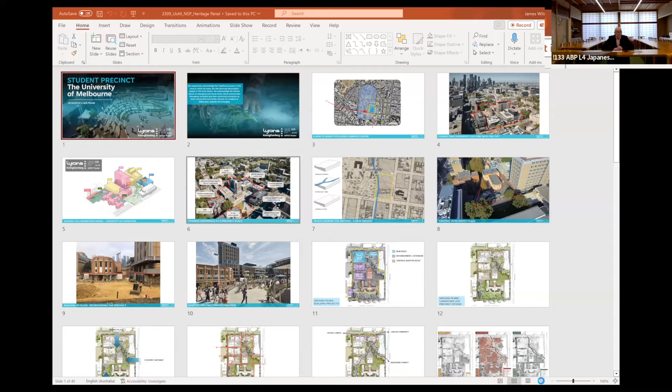Thanks, Philip. I'll add my number four yay to the vote as well, and I hope everyone's going to continue to tally throughout this presentation. Nathan and I are going to spend a few minutes setting up the precinct strategies—a lot to do with adaptation and heritage of a different time. I think Nigel and Marika will follow through with, I wouldn't say more straightforward, but more historical heritage, if you like. So the Student Precinct Project at the University of Melbourne is a large $230 million project that was done over the last six years.

It was indebted greatly to the knowledge of the local people, the Woiwurrung people, especially our collaborating Indigenous architect, Sarah Lynn Rees and Greenaway. But obviously we want to pay respects to all of the local Indigenous elders, past, present and emerging, as well as the ones that contributed to the project right across the country.

The project is in a corner of what would be considered the older reaches of the university, the big quadrangle here, on the corner of Grattan Street and Swanston Street. I think the story from the university is that it was moved there because that's the new epicentre of the university—and also because the student centre needed an available area of the university that required redevelopment.

But it hits two marks: it makes the student precinct an area of the university that now has outreach to Swanston Street and to the city. As you can see in this image, it's quite a large number of buildings integrated into this precinct. It connects straight to that spine into the city, but also connects into the depths of all the heritage and the campus of Melbourne University itself.

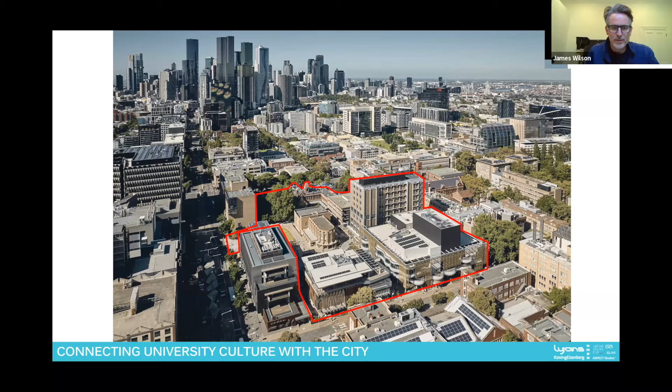It had a large collaboration team. On screen with us today is Koning Eisenberg, along with Lyons, NMBW. We also had Architects Eat, Greenaway Architects, along with two landscape architect firms, Aspect Studios and Glas. Everyone had a different part to play, dealing with different types of the brief—partly adaptive heritage and reuse, partly new build, partly urban design and landscape, and a lot to do with Indigenous knowledge coming into the whole precinct.

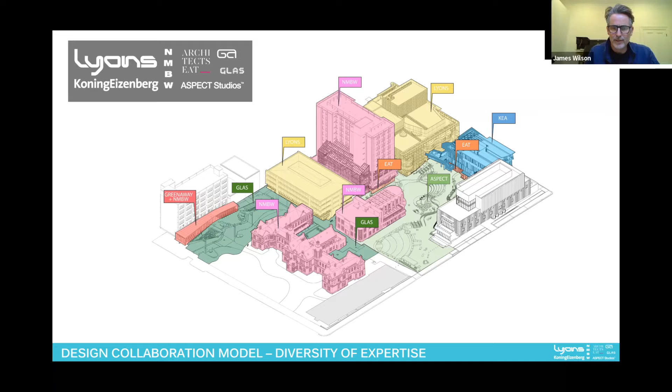I won't go into too much detail about what was in each of the buildings. Suffice to say, it was a complex array of things, all to do with student support and student culture.

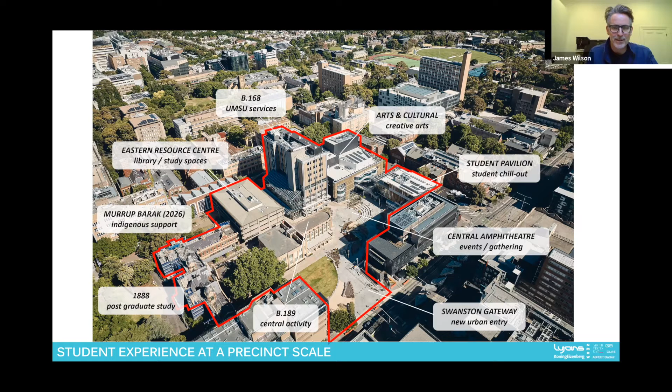Anything from performing arts through to events and gatherings, through to chill out zones, through to postgraduate studies, and importantly a bit that's still to come, an Indigenous Support Centre. So really it's a whole precinct revolved around student needs. It has no business case, it's not a faculty trying to get research money. It's all about students and about their experience.

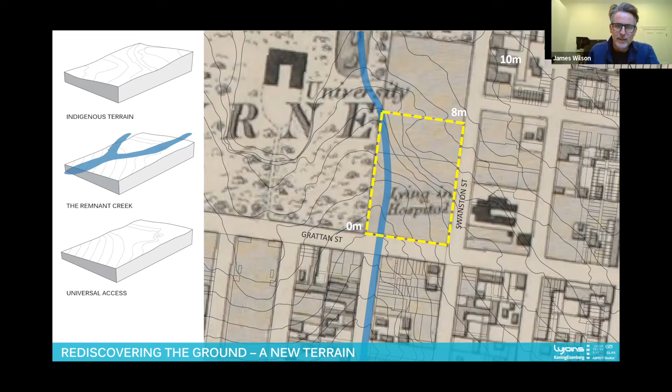The heritage of the site is really interesting. It's got a very steep slope from one corner to the other, about 8 metres. Generally the old contours of the site have been changed and altered with the built environment that's been brought into the site. So a lot of the history we looked at in terms of pre-building history was to do with the remnant creeks and waterways that came through the site, seeing if we couldn't introduce more of the Indigenous terrain that was there before the buildings themselves.

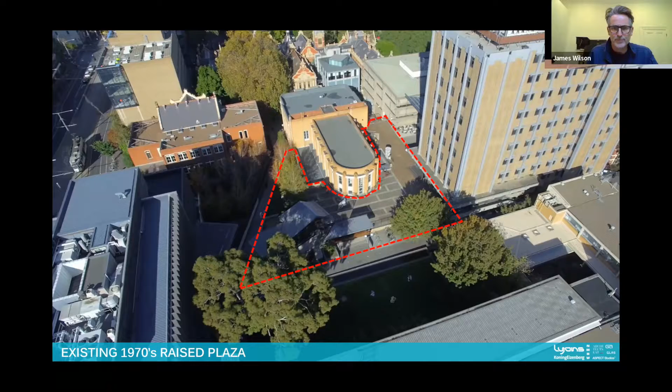But one of the biggest things we had to contend with was this raised plaza. If any of you know this precinct before the new precinct was built, it had a big 60s, 70s raised plaza that connected to these buildings to the right, the old Doug McDonell and the Eastern Resource Centre, under which stood lecture theatres, plant spaces, substations and so forth. But it really restricted a lot of the development around the site and the access through the site as well.

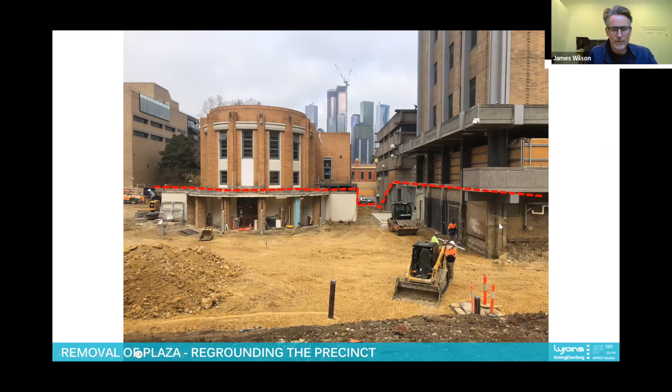So one of the earliest things done to the site, under a master plan early works by JCB Architects, was to remove this urban plaza, noted by the red line. What this did for us was, one, it brought it down to natural ground, which is a great starter for Indigenous cultural adaptation. Two, and this will be talked about later with Nigel and Marika, it uncovered a whole new ground interface which wasn't there before and had to be completely readapted from scratch. Effectively we've got this new precinct now, which, when you've integrated all those ground floor and new active components, is a complete transformation of the site.

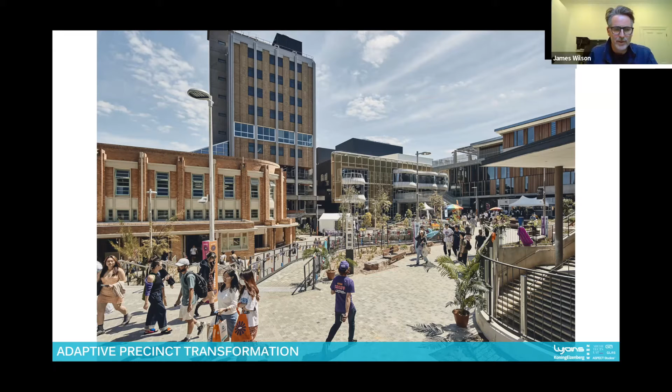The whole precinct was considered as landscape-led. So again, this was a story about starting with Indigenous ground and landscape, going through and around buildings. We literally master planned it, thinking about the pedestrian urban connections and groundscape first.

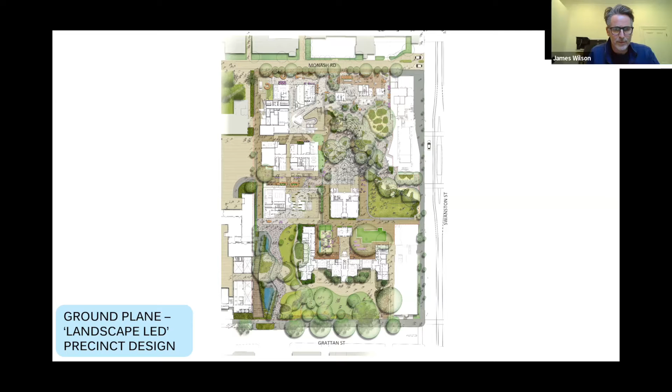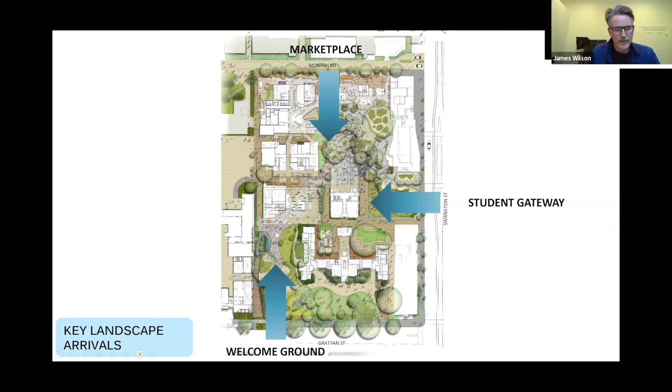And then it had 3 new important entry points. One from Swanston Street, a new opening to the university through a gateway created by actually knocking down an old heritage building, the John Smyth. An entry from Monash Road through a very active retail precinct, and a new idea of an entry from the south of Grattan Street called the Welcome Ground. This was an Indigenous terrain that was basically built into the project.

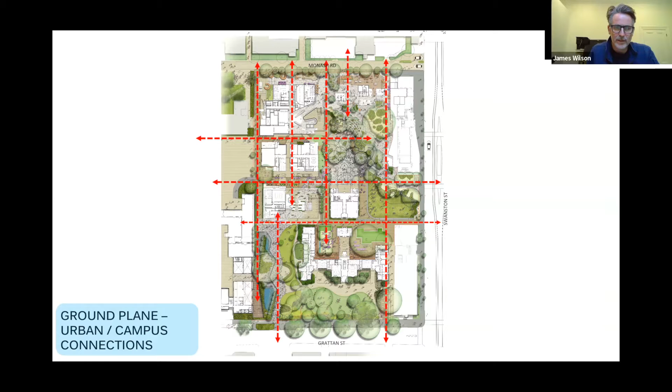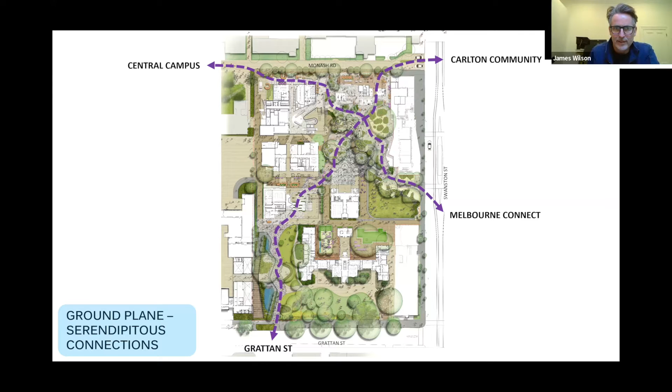We also wanted to connect with the heritage of the campus itself. It's not a precinct unto itself, it's connected to a much wider campus. So a lot of these laneways and access ways into the site were also brought within the precinct. But we also wanted the serendipitous to be known as well, people wandering through the site under these strange walkways, connecting Melbourne Connect, a new part of the campus, the Carlton community and Grattan Street.

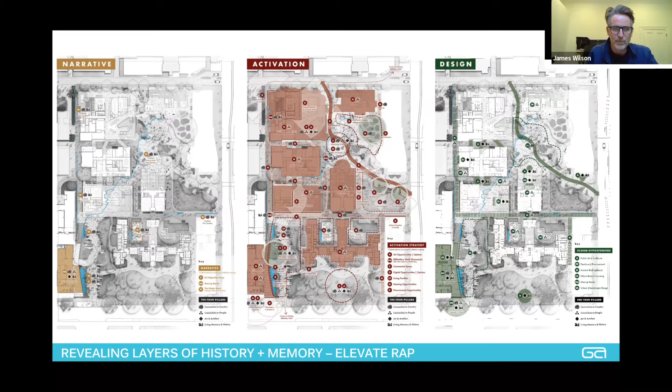Importantly, the work that GA did in terms of really looking at cultural histories and Indigenous histories was to look at what narratives and activations we could integrate into the precinct, into design. So part of the Elevate RAP that we were following, that the university had just instigated as part of the university's strategy, was to integrate physical properties and memory into the precinct. This is very different to just acknowledging Indigenous cultures, it's actually doing something.

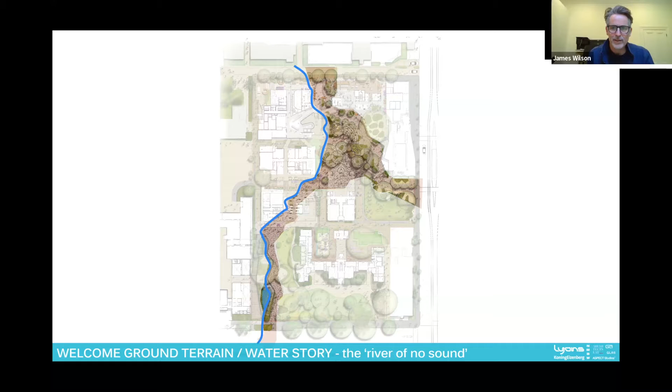And it went from the sort of mega stories, like the water story, the River of No Sound that was taken away from this site, integrating it back into the terrain, and actually having a landscape story that integrated local stones from around Victoria. This is a really big idea, down to really smaller ideas, like embedding Indigenous identity bricks into heritage fabric, which embeds cultural memory into old fabric and old projects.

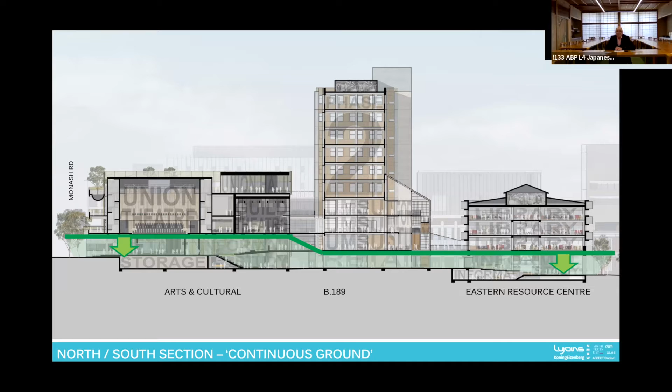Hi everyone, I'm Nathan Bishop, partner in charge of design at Koning Eizenberg and lead designer for the Student Pavilion. You want to go to the next one, James? You go to the next slide.

There we go. You may be able to tell I am not Australian, so I speak today completely... Oh, go one back to the pavilion, James. Sorry.

So I'm here today as an outsider and certainly not an expert in Australian history, but I want to zoom out for a minute and talk about a certain thread I see in the precinct, about changes in ideas about university life, the changing role of the university in the life of the city, and changing ideas about the lives of students while at school. I see a shift for the university from a space of detachment or removal for the purposes of study and becoming, which is still a notion very present in American universities. I see it moving away from the idea of a cloister, with buildings and spaces that disconnect and detach from the ground and context, to more of a place of connection, fostering community, creating transparency, interconnectedness, visibility, and inclusiveness. So this is a certain inversion, a turning inside out of this old cloister model to one of more engagement and encounter that I think is present across the precinct.

So the Student Pavilion that you see here on Monash makes an effort to feel embedded into the land, with nooks and crannies carved into the sidewalk, trying to create spaces of encounter and foster a new kind of attachment, engagement, and entanglement with public space. Go to the next one, James.

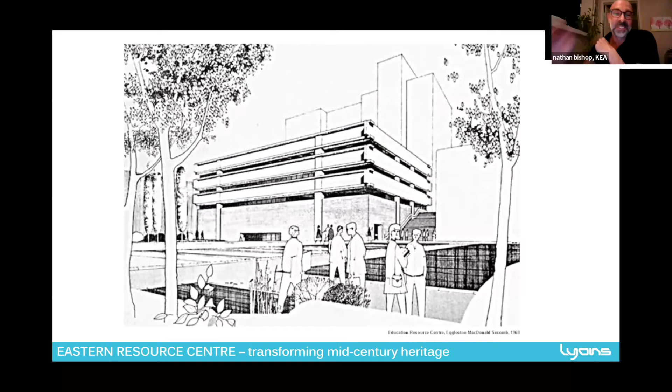I think that's a cool animation, I didn't see that in the original. I think the ERC typifies this inversion I'm talking about, where a formerly introverted building detached from its context is turned inside out, transformed from a place of seclusion and detachment to a space of engagement and support for social dimensions, making fuzzier edges and blurrier boundaries, creating more visibility and activity, and presenting a new model for engagement between building, grounds, and people at school. You go to the next one.

So the strategy really pervades the precinct, making fewer and fewer discrete spaces and erasing more and more of the interiors of buildings to have a more continuous flow of public space originating in the landscape. Next slide.

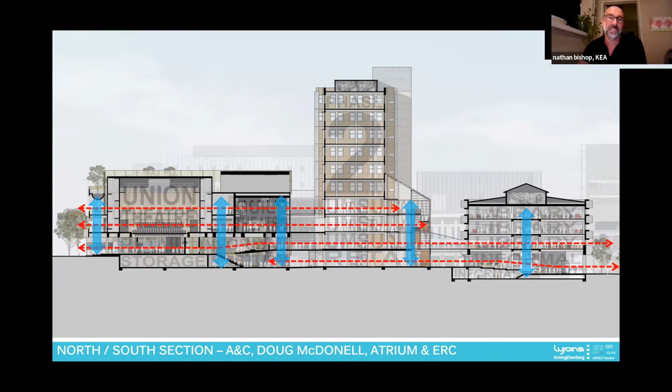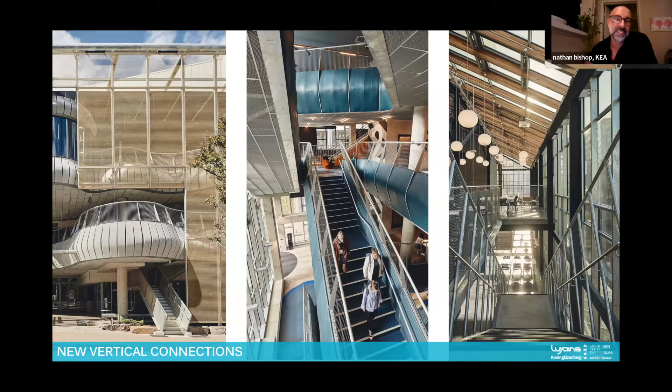It's brought through places of vertical movement, interconnecting all levels with visible movement and activity, threading through all the spaces. Go to the next slide. So the Student Pavilion, with its upper level balconies and patios, tries to make them more visibly engaged with multiplied ideas about ground over the whole height of the building. Go to the next slide.

And lastly, we have this expressive stair and bridge linking arts and culture and the amphitheater, all pulled up through the building, creating more spaces where you can see people moving, which is also a kind of inversion on buildings. So with the pavilion, we're really trying to add a kind of architecture to the university that would support a form of casual social engagement, placing it within the precinct to foreground a new kind of idea space for students. It's a model that stands in contrast, or as an alternative, to more conventional institutional, privileged notions of academic space, offering a more inclusive social space.

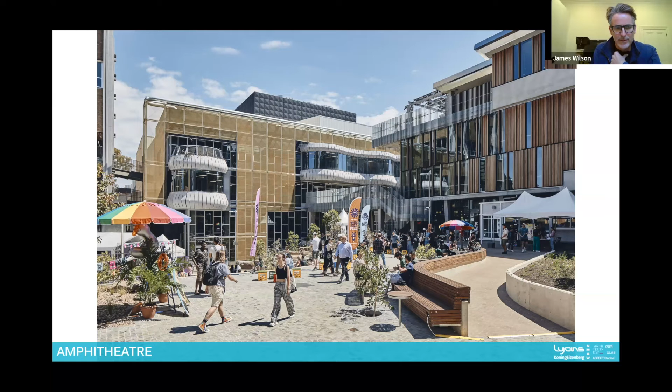And again, I'll flick through these because I think we'll get onto the actual memory and heritage parts that Nigel will take over.

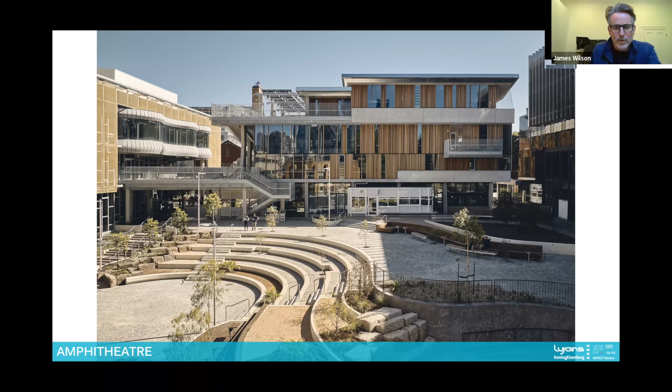But the major part I'll finish off on was the amphitheatre. It's a very new part of the university, and a big part of the Indigenous story about connecting, yarning, landscape, bringing everyone together within the centre of the precinct. And of course, it's amplified by this beautiful restored Frank Tate building, which I'll hand over to Nigel and Marika to talk about.

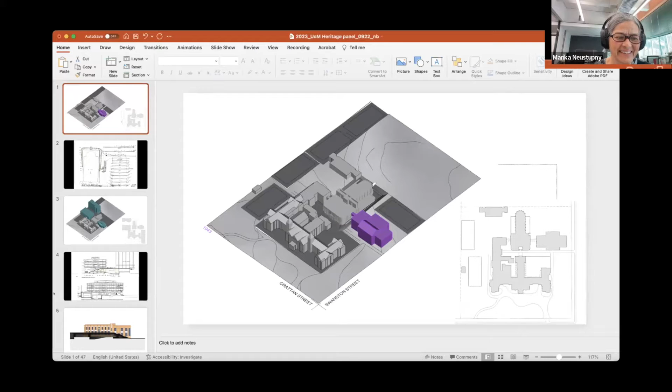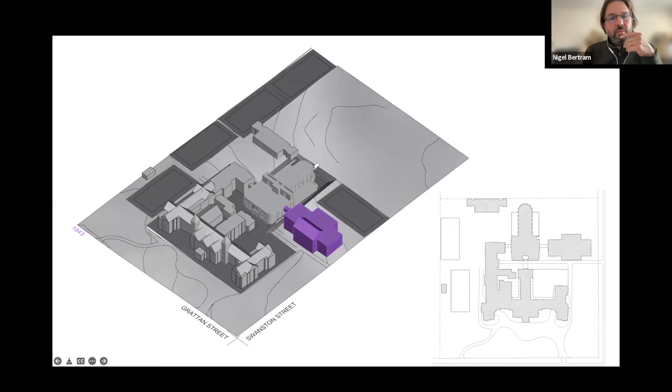Okay, I'm going to move straight on and just say that part of the process of unpacking this previous teachers' college, we actually had to reconstruct physically the layers of what happened. Some curious things - like the old Frank Tate building was originally just an appendage to the 1888 building, literally linked by raised bridges. And the current apse, facing the amphitheatre, was the back of the building, like a fire escape, embedded into the ground in a kind of retaining wall.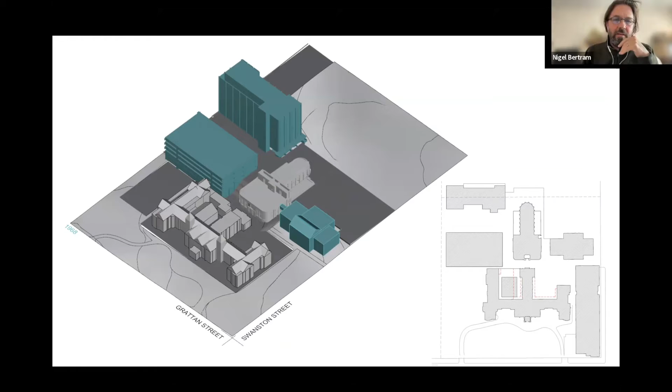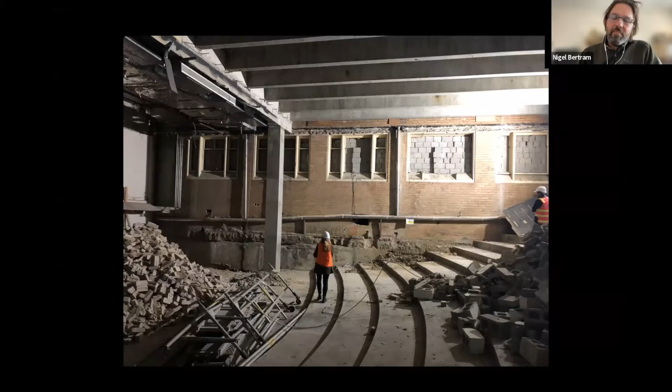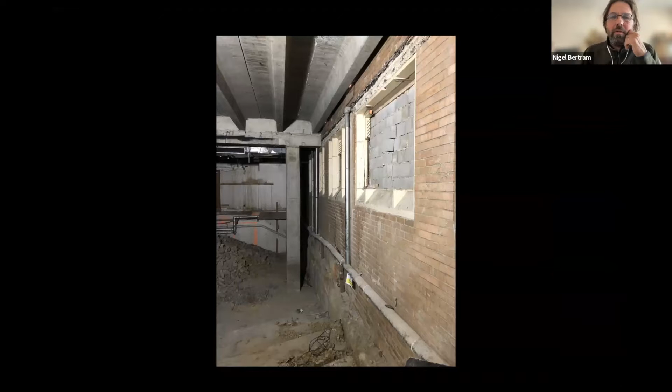And then in the 60s, when this raised plaza and the late modern buildings got built, of course, as James said, everything changed. So we were very interested in these strange moments of different ideas overlapping and bashing onto each other, and started trying to literally draw that out to understand the problem we were faced with. At this great moment when the demolition had been done, in the photos James showed, it was exciting to find the old fabric of the building that was previously covered in plasterboard and reveal it - you can see it's in pretty bad condition.

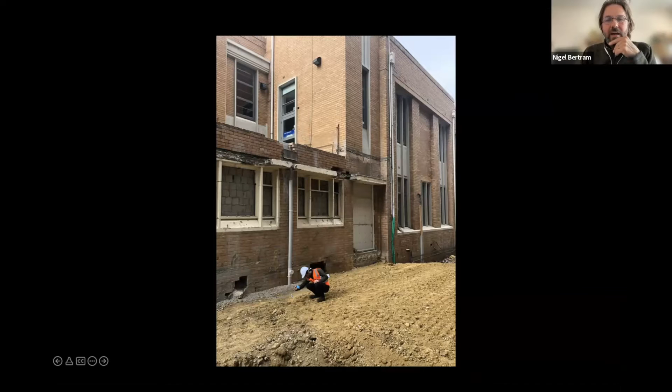The concrete's been hacked off and the windows have been blocked in. And this is how we found this kind of archaeological ruin almost of the building that's been embedded in the ground.

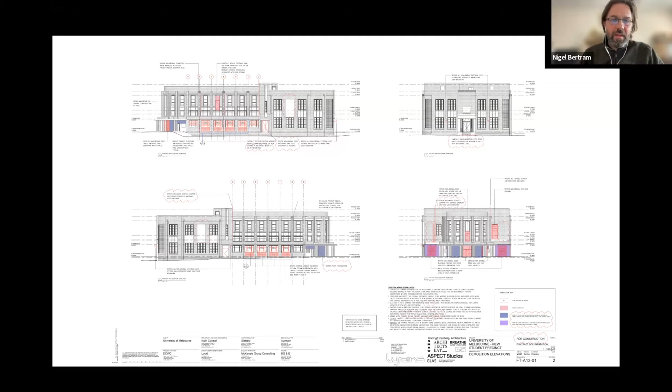Our process for design was to try to be very careful and understand what was important and what was not. The outside of this building was heritage listed, but the inside was not. But we thought the whole brick interior meant we had to treat the whole thing with great care and respect. So this is the demolition plan of the non-original bits, and this is the repair plan, which is the conservation works to bring that very degraded building back to some form of wholeness.

At the same time, the original building was quite odd and completely disconnected from its context. The main gymnasium was flanked by toilets and change rooms, and the whole thing was rigidly symmetrical, following the segregation of the sexes from the 1940s ideology of the Teachers' College.

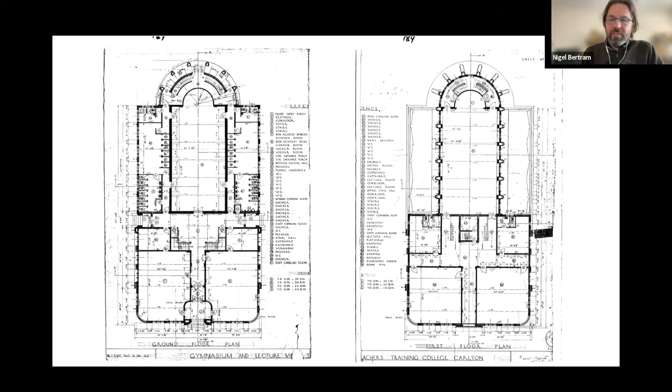So we thought that to put that into the contemporary university framework that Nathan was talking about, some actual quite dramatic or even violent change was required.

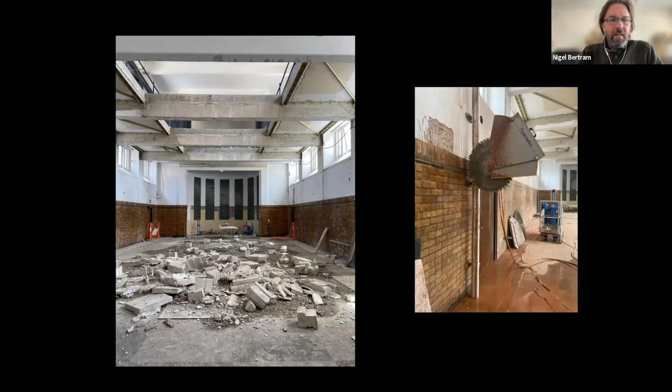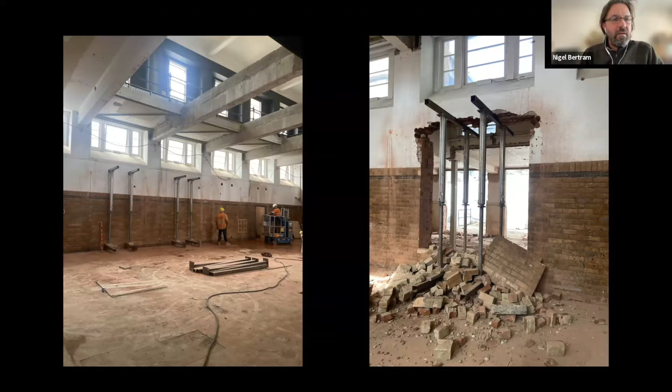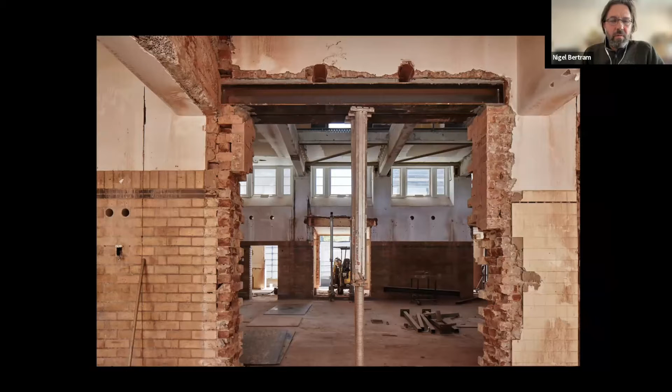So we thought we'd have a go at cutting a few holes, in what is load-bearing brickwork construction. We became very interested in these needle and prop techniques that opened up a logical series of openings that both completely transformed, but also respected the structural imprint, or the parti, of the building.

So the old gymnasium, which was a completely isolated chamber, is now a free-flowing space that extends vertically and horizontally, and the students can literally flow through it. You might think of it as democratizing the space we found, bringing it into a new era of a new role for a university campus in society and in the city.

When we had to intervene, we felt under great pressure to do something that was both new and also understanding of the original Percy Everett design ethos.

So the doors allow a whole lot of different uses of this building, which was previously like a tomb, and now is able to be activated and have bands and sausage sizzles and ping pong tournaments and all sorts of things.

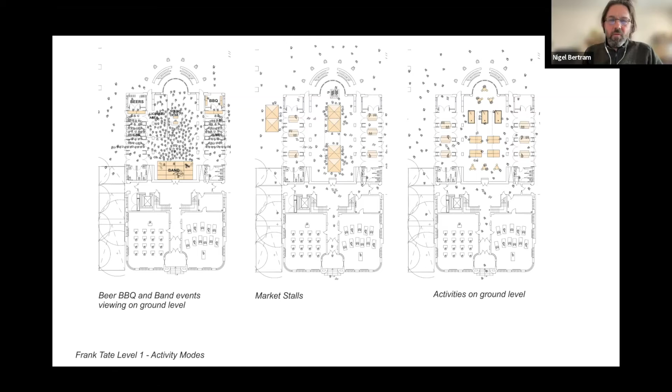And this horizontal connectivity through the new doors, with the raised floor, brings it up to the new welcome ground paving, so that student life can just flow through it.

So we'll switch to talking about 1888, which is that E-shaped building. Yep, just on the left next to Frank Tate in the middle.

168, say. And the courtyard is just what I wanted to point out here, that the courtyard is suddenly linking 1888 through all the way to the rest of the precinct, whereas previously it was really separated off.

And we'll show you a few slides of how now from the courtyard we can look up all the way to 168 that Nigel was just talking about, Frank Tate, the ERC with the little animation on the left, and all the way through to arts and culture and so on, and up to Monash Road.

Yes, next. So the plan of the 1888 building, just quickly—there were four main insertions that we made. So two of them are quite surface. Just on the middle at the top is a sort of circular window.

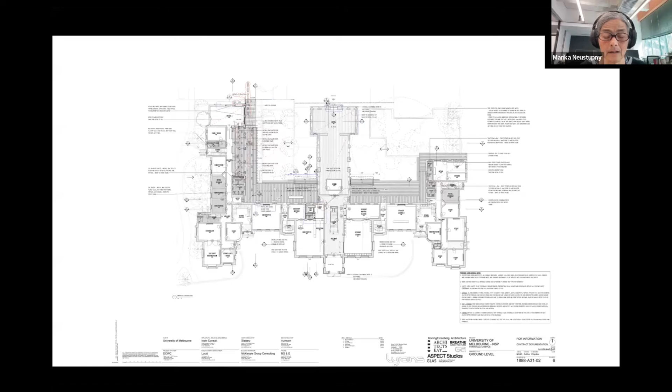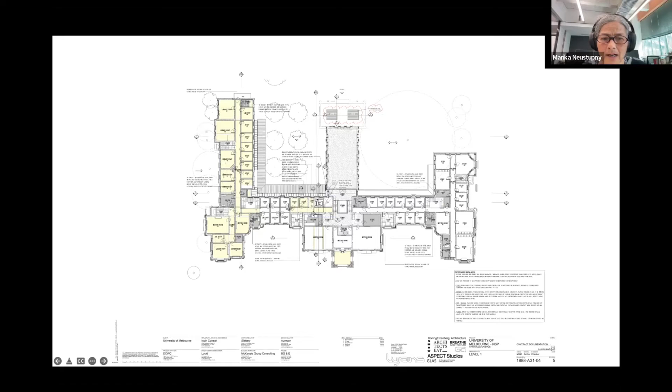Here's a couple of plans, just to show you that the new lift is in this location, which means it can also open into the Griffin Gallery, at a sort of mid-level, which the old lift couldn't do. This also means it can interact with all the levels, including this main level, upper level, and even the top level. All these were not able to be accessed with the previous external lift.

So internally, there was minimal work, but it was about retaining and allowing the existing condition to be recognised, including, for example, pulling the furniture away from the windows so that you could actually get near the windows and experience the beautiful work that's there.

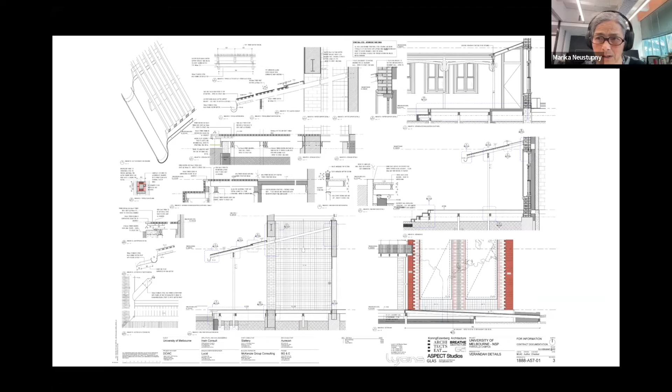So here's the insert with the veranda, which links with the gutter detail straight towards the courtyard, water story, which James was mentioning, linking all the way through into the details of the courtyard. People walking through in various directions, experiencing the new glazed bricks, the new circular window, relationships to ERC and the Frank Tate building, and an actual experience of the old stairway that's been removed.

So this is all part of our discussion of trying to actually make prominent and visible the layers of history, rather than just deleting them or covering them up in one way or the other. So suddenly all our portions of the project become part of the whole precinct, with a sense of continuity and change at the same time.

So there's restoration within a new setting and experience - the revealing of history and the new use and activity, which, for example, Nigel was talking about, really makes it possible to experience and understand the kind of layers of history that are there.

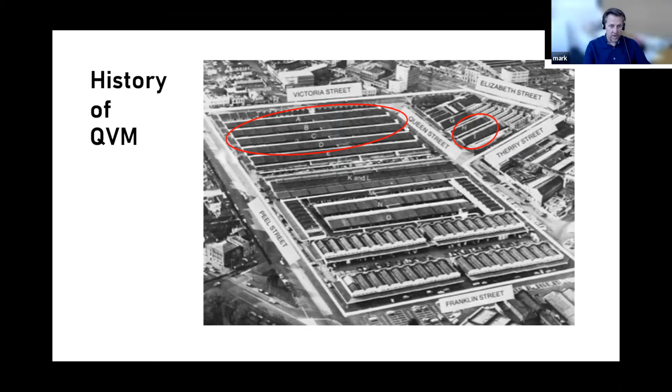But our works, and the collection of buildings, are on the national list as well as the state list, Heritage Victoria's list, and also the local listing, just to recognise that post-European heritage. As I said, there is that traditional layer there too, which isn't really seen through the sheds, but our project really focused on the buildings and the restorations of the buildings.

So with the brief itself, it was one we worked on in conjunction with the City of Melbourne, and it involved the complete overhaul of sheds A to D, and H and I, covering all the structure and services. We also looked at improved trader facilities, to ensure the market continued to operate and could offer a greater variety of programs, as well as a more diverse beverage market offering.

As part of that brief, it was important for the City of Melbourne and the market itself to make sure the works took place in situ. This is really where a lot of the challenges lay, in allowing the works to continue with minimal disruption to the traders and to the market itself. It was also important for the project to allow changes which didn't adversely impact the heritage fabric of the sheds.

Part of the brief was also to have consultation with the stakeholders and the general public, and that was really important to the City of Melbourne to have built into the brief itself.

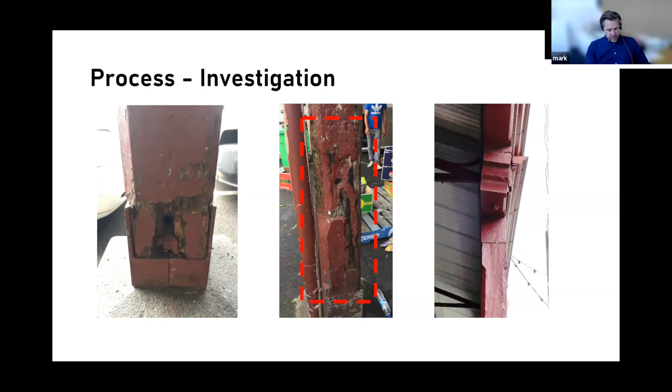Now, Mark, you've gone 9 minutes. Oh, 9 minutes, okay. All right, cool. I'll speed up. Yeah, no worries.

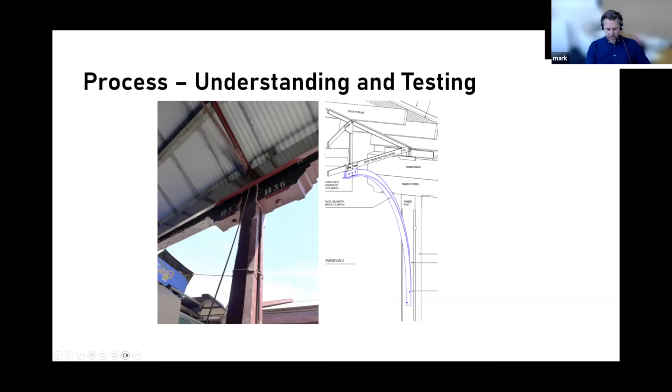So I'll just flick through the slides then. We did a lot of understanding and testing, a lot of drawings where we were understanding what the issues were, with a lot of input from the structural engineers in dealing with these issues. We then did a series of drawings looking at what the decays were, and a lot of documentation so we could inform the builder of how to go about it, so step-by-step drawings were produced.

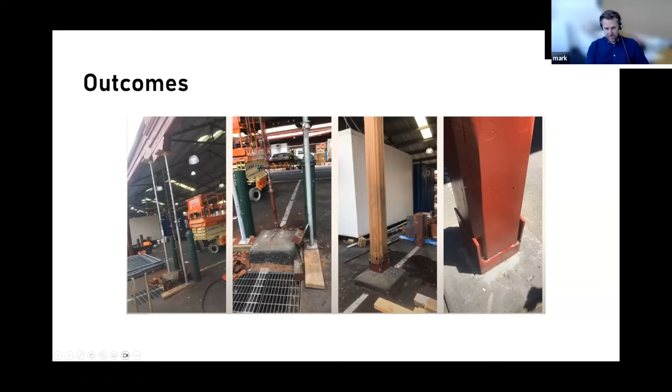And these were some of the outcomes, where new timber posts were put in, new section joists were put in with scarfing of the stirrups at the bottom there. A new timber roof was put on, and a lot of repair works were done to the trusses themselves.

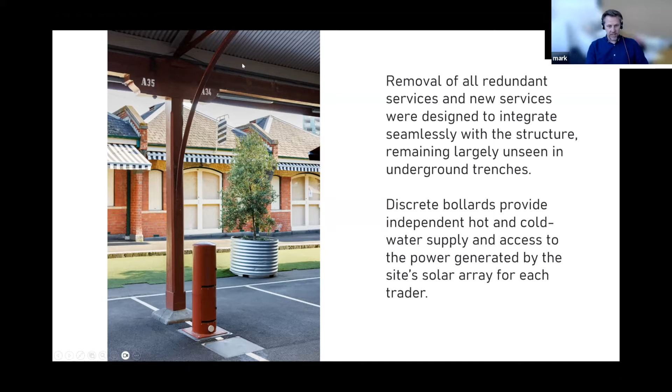And really the outcome is this: there are some new service bollards which service the traders, and this allowed all the redundant infrastructure to be removed. This is point of sale information that NH Architecture worked closely with the traders on.

To summarise the challenges we had: it was really important to preserve the tangible and intangible values of the sheds, as they're a really important part of Melbourne's history. It was important to retain that historical patina, so we weren't just taking things out because they looked scruffy. We wanted to keep the fabric, and that brought challenges in balancing modern building and commercial standards. A lot of input from the structural engineer and building surveyor enabled the site to be viable with longevity as a continued and flexible market space.

So there we go. Did I make the 10 minutes, Philip?

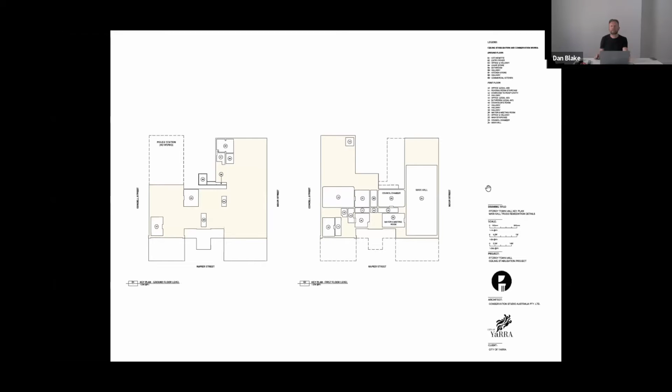Looking at various ways of consolidating ceilings, there are a number of different approaches to this issue. One method is the pinning system, which is a mechanical based fixing system. We would tend to use that system where we're unable to access the floor cavity or ceiling cavity, or where removal of floors above would cause more detrimental impact than losing small amounts of plaster ceiling in order to achieve a mechanical fixing detail.

Where cavities above ceiling spaces are able to be accessed, we would look at a resin system, a 2-part epoxy resin applied in two applications, which consolidates the ceiling and bonds what we call the lath keys, which are plaster keys that help hold the plaster to the lath system back to the original plaster.

In the main hall, we had really deep profile moldings where we wouldn't get saturation of that epoxy resin system into the depth of the molding. So we looked at using copper cable wire to tie off those deep profile moldings and ensure they're re-adhered back to the ceiling structure above.

You can see below the mayor's meeting room, a space with a decorative ceiling dating from the early 1910s that was consolidated. This ceiling was repaired in the 1980s and had a lot of repair systems that had begun to fail and change.

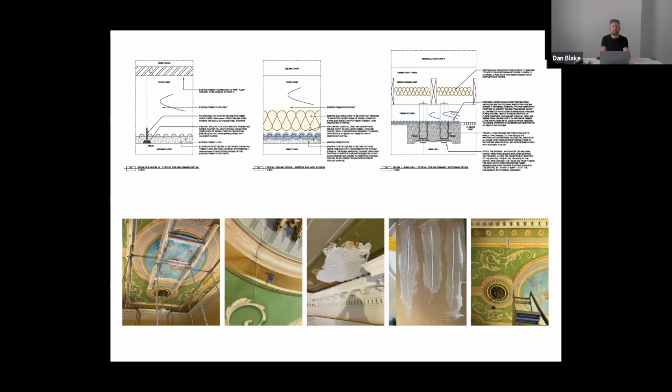This is the former council chamber. In the 1930s, a new ceiling was put into the council chamber which concealed an earlier original paper hand-painted ceiling with stencil work.

While doing works on the site in February, we had very heavy rain events that resulted in flash flooding of the roof above. These internalised gutter systems, which took the front gutter to the middle gutter and to the rear gutter, were not coping with that. They were overflowing and flooding, causing damage to the 1930s ceiling.

And as we then later found out, below that was the paper ceiling, completely covered in mold and very, very badly damaged.

As part of this work, we investigated putting in a very contemporary and modern hydraulic system, which is a closed siphonic system that we retrospectively added to the drainage system. This now allows us to take all the water from the front and back and provide overflows to the roof that previously didn't have them. This is using an adaptation of current modern technology applied to a heritage building to solve a complex situation without altering the building in a major way. We're able to leave the original box gutters internalised in the roof, side by side with the new system.

The mould, obviously, is severely damaged. This was assessed heavily by conservators, and we reviewed this over a long period of time, trying to dry out the room and dehumidify it. Unfortunately, it resulted in an enormous loss of paper, about 50% of the actual room, retaining smaller areas of the original paper here, which we were able to clean and conserve by mechanically scraping back little bits of surface mould. The timber lining substrate above also had mould on it.

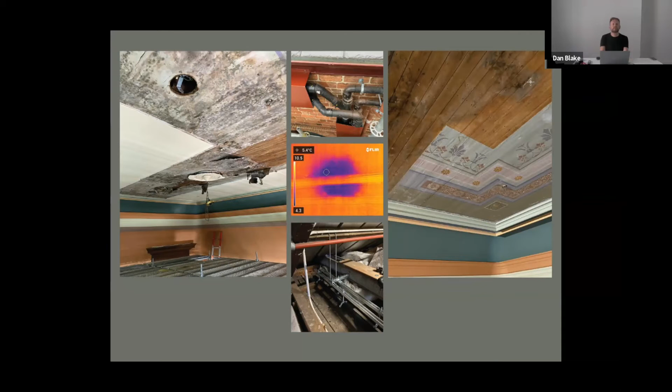This was brushed and sanded back to remove mould so that we could retain the original substrate. We then began working with a series of specialist trades to restore this ceiling and conserve the parts of it that still remained, including looking at very traditional installation techniques. This paper ceiling is over a hessian lining, like a scrim, pulled tight over the timber lining boards. This is not a technique that is used very regularly anymore; it's a very rare technique of applying these sorts of finishes.

We worked extremely closely with a plasterer, a decorator, and conservators, trialling this many different times to make sure we got the tension in the hessian correctly, and made sure we got the right amount of glue without causing too much problem with the paper once it was lined. We then went through the process of reinstating all the missing parts of the ceiling.

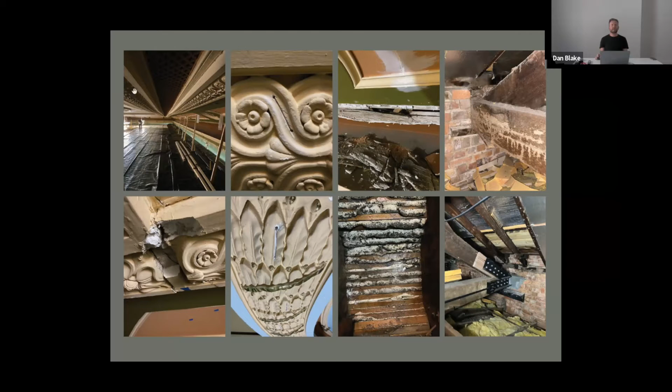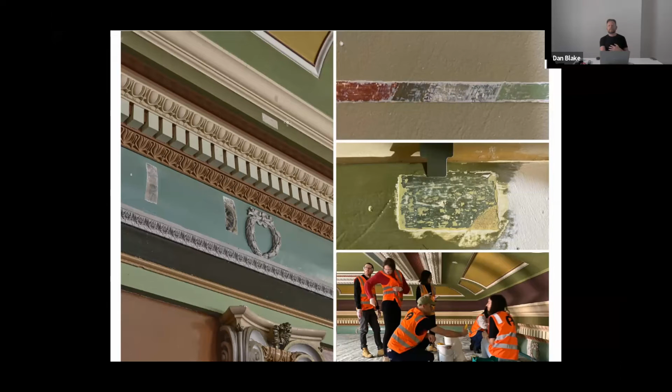We then went through a process of Westox treating the ceiling, a two-part epoxy resin to bond it all back together, and began a stitching pattern on all the deeper mouldings, these very deep profile mouldings. You can see the wave in that ceiling as it had begun to collapse. We also went through paint sample analysis to determine the original scheme and investigated the entire ceiling scheme over several months. This documentation shows all the original stencil design work, but unfortunately we didn't have the budget to reinstate all the stencil work, though we did restore the correct colour scheme.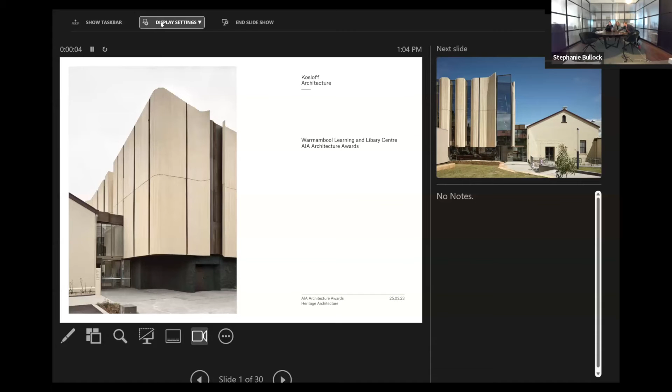That's right. Now you're good. Excellent.

In terms of this particular project, we would also like to acknowledge the traditional owners of the site on which the project stands. It's in Warrnambool, so the Gunditjmara people as well.

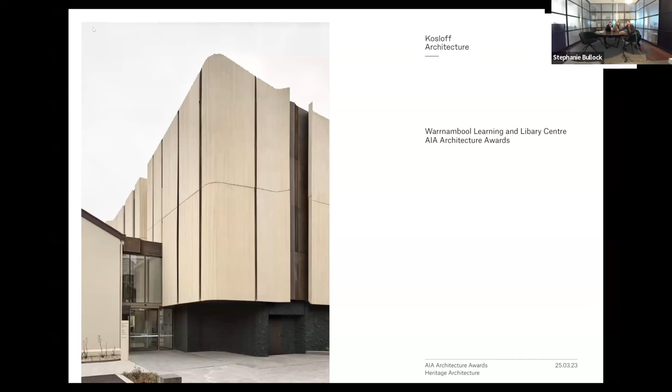This project grappled with two fundamental questions originally: can public architecture be a real agent for change within a regional community? And second, how might we breathe new life into a heritage context through a contemporary lens?

The Warrnambool Learning and Library Centre is in Warrnambool, a beach town west of Melbourne, on the Great Ocean Road. The project was jointly funded by the Victorian Government, South West TAFE, and the Warrnambool City Council, and consequently had a very complex client governance structure.

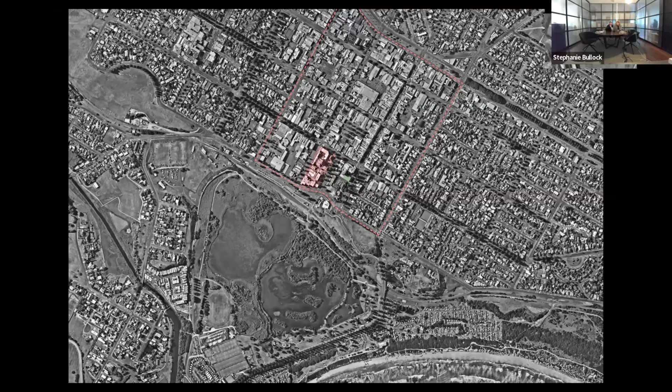It replaced the existing Warrnambool Library, shown in green on the slide, with a much larger space in the heart of Warrnambool CBD.

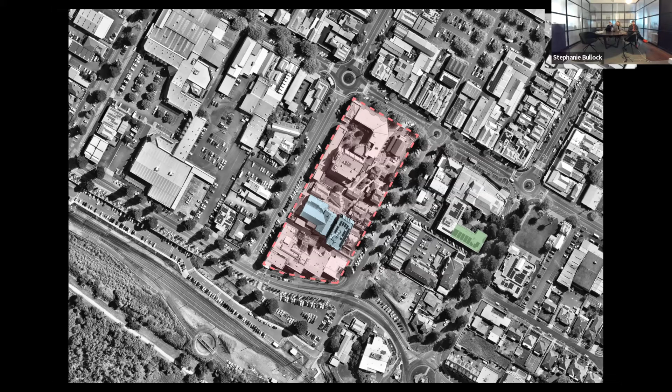At the start of the project, we looked at a variety of potential sites and also buildings for adaptive reuse within the campus.

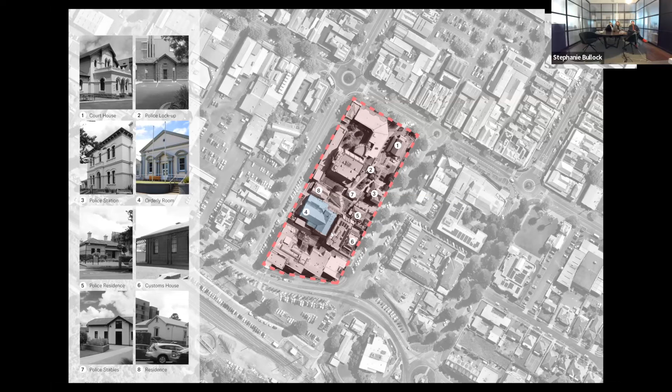In the end, the optimum combinational location was determined to be to refurbish the largest existing heritage building on the site, which is the orderly room, shown in blue, and then to extend this or connect it to a new 3-storey contemporary structure.

We worked very closely with heritage consultant Bryce Raworth to understand the history of the site and the orderly room in particular. Through the research Bryce did, it was determined that the building had been extended several times over the years. The first 3 stages were considered to be of most heritage value, and all of these have been retained within the final design.

The research Bryce did also revealed that during the second extension to the building in 1875, the orderly room was extended east and a stage was added at the eastern end. Whilst this stage had been removed many years before we started on the project, this understanding of the original operation of the main hall contributed significantly to our understanding of how we might link the original building and the new 3-storey contemporary structure.

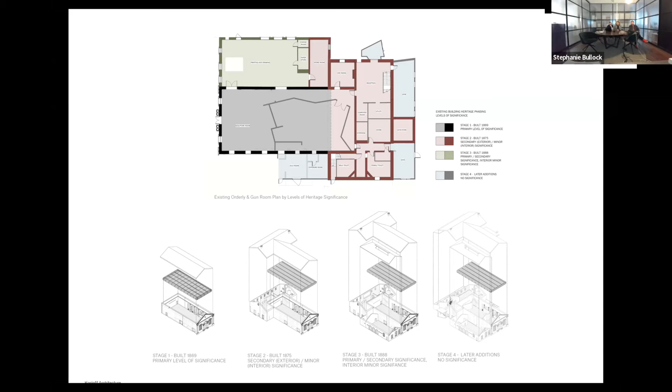We had 2 really key site strategies that informed the formal resolution of our design. The first, on the left, was connection through the building and campus, central campus straight up to the CBD, which was to the north. The second was really maintaining a north-south connection through the campus with an internal laneway that separated the orderly room from our contemporary extension.

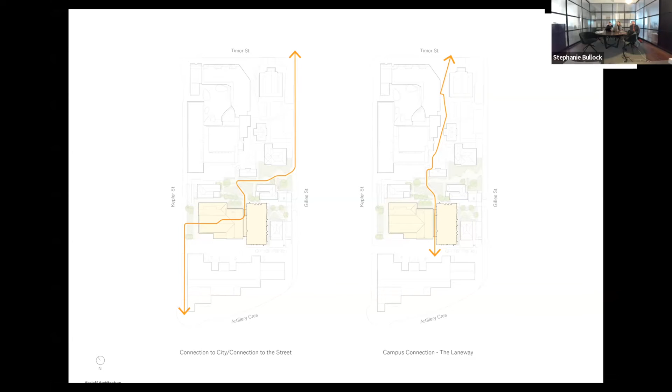You can see from this site plan that the project included significant external works to develop pathways from the building to both adjacent streets and other areas within the campus. This also included navigating a very significant level change from the street and the northern part of the campus in particular. The orderly room is on the western side, and the new contemporary addition is located to the east.

The orderly room and the contemporary extension are knitted together with the insertion of a new grand stair. There's a glazed linkway between the two that draws light back into the centre of the building, but also provides a very clear distinction between the heritage element and our contemporary addition.

The grand stair or bridge operates in a similarly performative manner as the original stage within this room, with landings that offer space enough for seating and performances, and the kind of return of the speaker's corner, if you like.

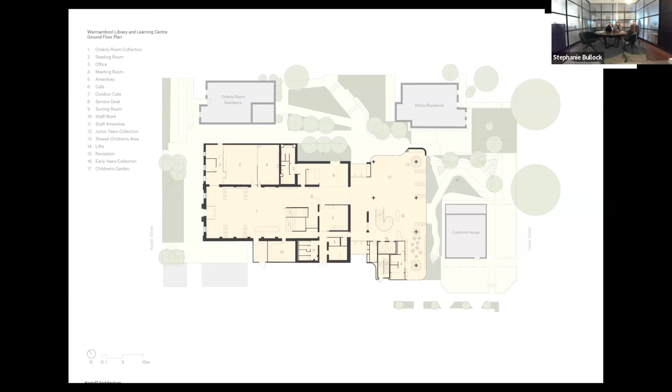The ground floor houses the main entry to the library, just to the west. It also has a skills and job centre, an indoor-outdoor cafe, and various parts of the collection, including the children's collection in particular.

Then on the middle level, there's a youth and games and digital media training zone, a whole range of meeting rooms, and also the non-fiction area of the library in the contemporary section. Finally, the top level contains the fiction collection, as well as more meeting spaces and a reading lounge with views out to the ocean.

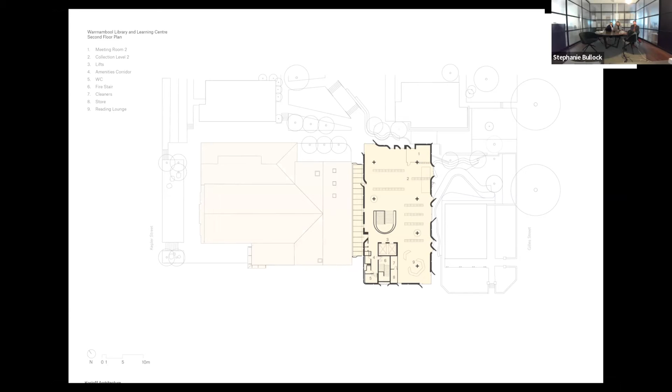The building's always read against or through this heritage context, which is the campus. It acts as a foil for the adjacent heritage listed buildings, from which it's clearly different, but it has the same investment in detailing and articulation.

The Orderly room had been used for many different purposes since it was built, most recently as teaching and learning spaces and offices by South West TAFE. The exterior shell was largely intact, but there had been a number of very poor quality recent structures adhered to it, as well as some odd structures installed within it. These were all removed, and the exterior was repainted in accordance with heritage recommendations.

The end result is that the new front door to the library is now through the heritage building. The internal space you enter when you come through the front door is now the largest public space in Warrnambool, except maybe for Bunnings. It's a true civic space.

It was wonderful when we did the original consultation. We held it within this space, and there were quite a few people who had actually never been in there, even though they had lived in Warrnambool their whole life.

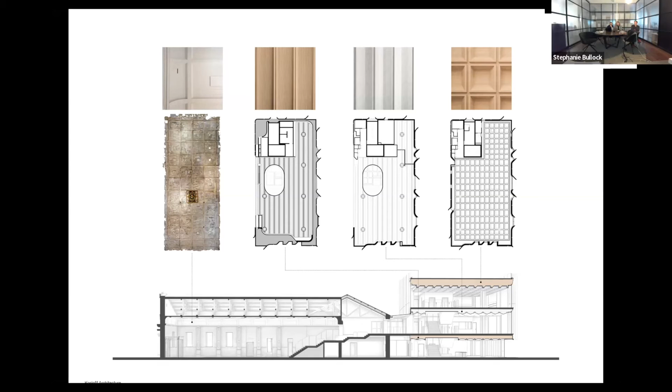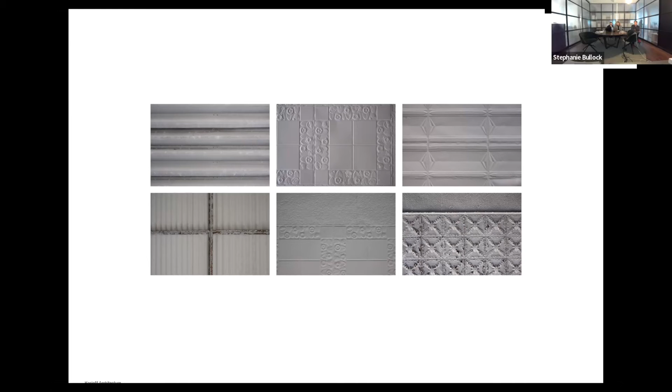The ceiling plane continues what we consider a spatial dialogue with the awning walkways found throughout Warrnambool as well. Ornamental pressed tin, corrugated metal and timber lines reflect a local vernacular language that manifests beyond the Orderly room itself, throughout the broader town.

The ground floor has a scalloped ceiling, referencing the oversized cornice of the Orderly room.

The middle level has a sort of folded white concertina surface, the colour and linear nature visually linking it back to that Orderly room ceiling. Finally, the top floor has its continuous timber coffered ceiling, another contemporary manifestation of the Orderly room grid.

Throughout the project, the ceiling is really the only true singular connective device of each level, and it's an unencumbered gesture that defines each of these interiors.

You've done 9 minutes. Nearly there.

There was a decision earlier on that we made to utilise a rectilinear floor plate. It was partly a tight site, but it was also a budgetary constraint.

Around this is a precast concrete facade that's been strategically peeled back to create opportunities of occupation inside, as well as curate the views around that surrounding context.

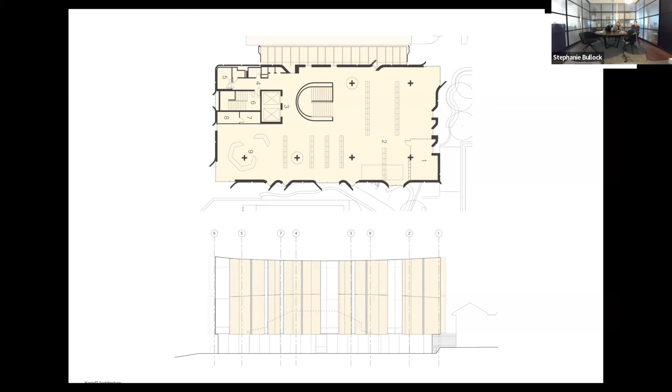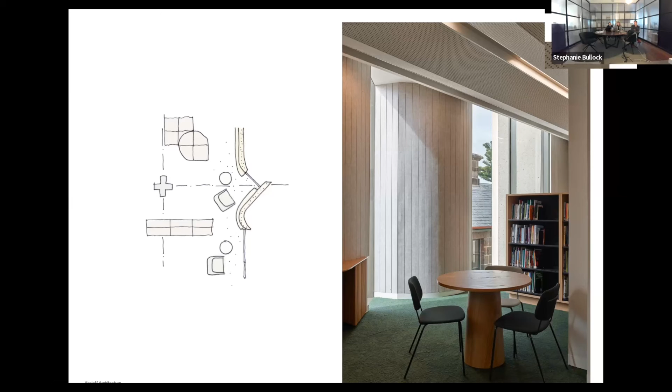Its depth creates a kind of diffused or soft light internally and defines each of these reading or reflection areas. There's a quality of light that changes over the course of the day. It's really beautiful within these spaces, creating moments of compression and enclosure that I suppose are reminiscent of a domesticity.

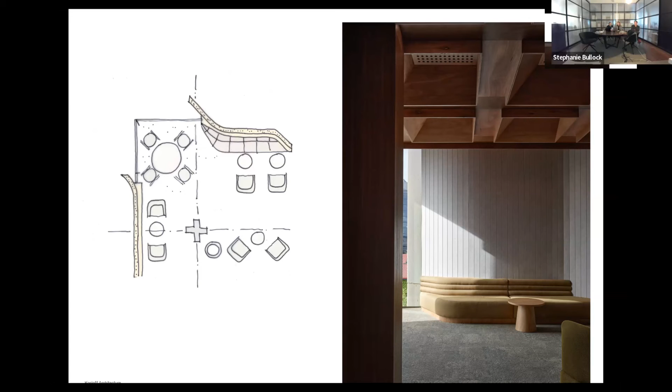So at dusk, those highly articulated ceilings glow and they're visible from all of the surrounding streets and pathways and within the campus. And we think the success of the project lies fundamentally in its generosity.

It's provided the whole community with access to one of the most significant heritage precincts and buildings in Warrnambool, as well as revitalising and opening up the heart of the South West TAFE campus. And there's been measurably positive community impact in terms of book loans, services, community use, and also the student experience, demonstrated by the uplift in student attendance.

So I guess in summary, we think it demonstrates the ability for public architecture to deliver really meaningful change within a regional city through an architecture of generosity and a deep respect for context, heritage, and community.